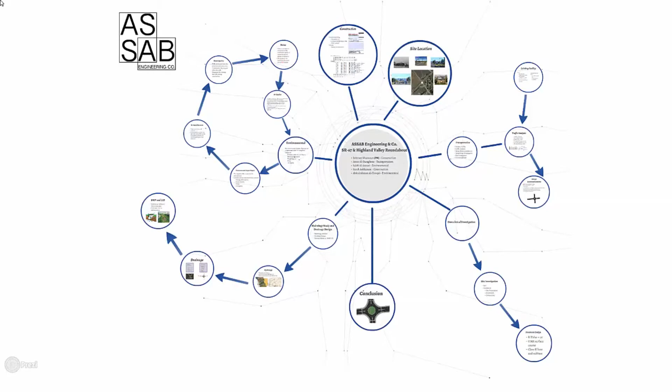My name is Abdulrahman Al-Hukal, and I'm in charge of the hydrology study and drainage aspect of this project. My name is Sarah Ashkenani, and I am in charge of the construction scheduling, and I aided in the transportation aspect of the project. In this video, we will be discussing our approaches and findings of the project.

We have been hired to do the SR67 and Highland Valley roundabout. Our design team will address the transportation, stormwater, environmental, and construction aspects of the project. The purpose of this project is to improve traffic flow on State Route 67 with the design and production of an effective roundabout. An effective roundabout assists and accommodates the flow of vehicles with both safety and efficiency.

The SR67 and Highland Valley intersection is planned to be developed into an efficient roundabout. The SR67 and Highland Valley intersection has been dealing with insufficient roadways for years, with high levels of traffic congestion and queue lengths of over 2 miles. State Route 67 is known as a highly dangerous highway due to high numbers of fatalities on the road.

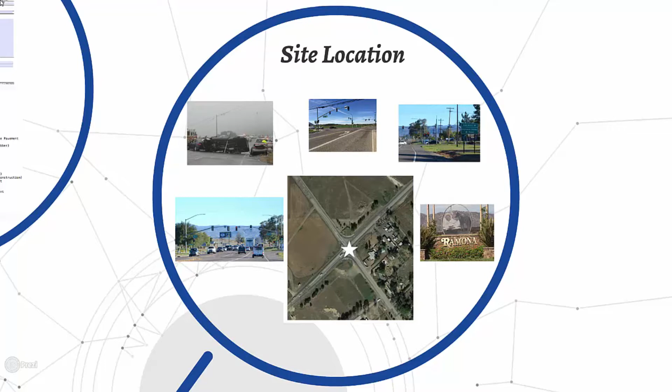This study was done to evaluate the potential geological concerns at the subject site, since it relates to the proposed development and design parameters. Based on the map from the Hydrology Manual of San Diego County, the soil in the area is Class C, meaning that it has a slow infiltration rate. There are no fault zones in close proximity, as well as non-active seismic zones.

However, the soil on site is prone to liquefaction, which is why the topsoil and subsurface soil should be removed and compacted again. Earthwork will consist of site preparation, excavation, and compaction. Any compressible material must be removed and oversized rock should be hauled off-site.

The soils on-site can be used for compacted fill if they do not contain any debris, organic materials, or oversized rocks. The fill soils should be relatively compacted to at least 90% based on the maximum dry density of the ASTM test method D1557.

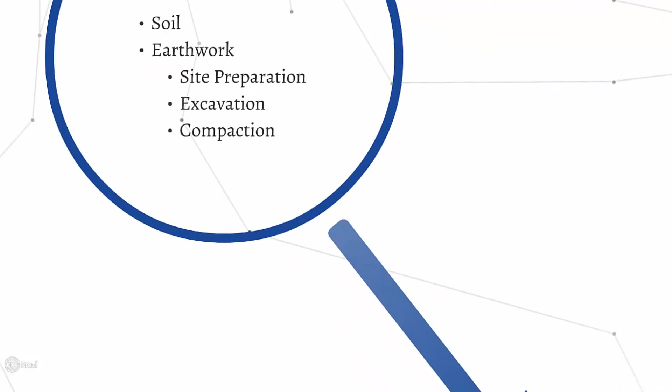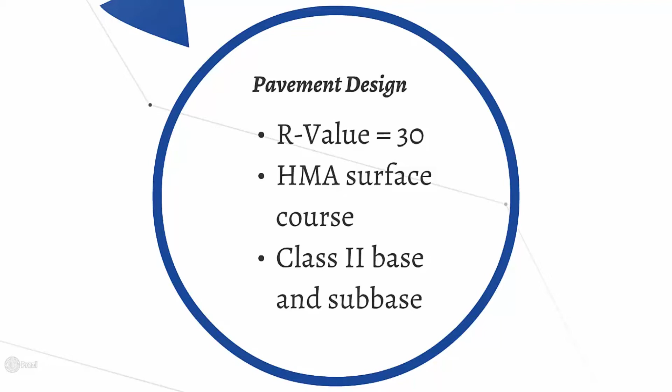An R value of 30 was used for the pavement design based on our experience of the area and the review and evaluation of geological and geotechnical literature. The new pavement structure will consist of a hot mix asphalt surface course and Class 2 base and sub-base. After conducting a geotechnical investigation of the site, the proposed development is feasible from a geotechnical perspective.

The existing facility consists of SR67, which is a 2-lane rural highway with traffic lanes and shoulders of 12 and 8 feet respectively. A 12-foot left turn lane and a 12-foot right turn lane are present in the north and southbound directions, and it is maintained by the State of California.

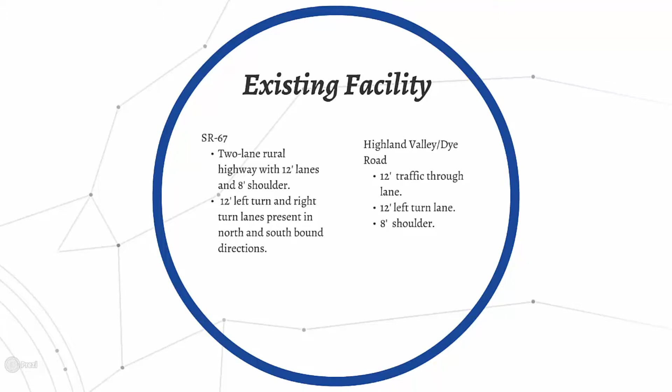Highland Valley and Dye Road consist of a 12-foot traffic through lane, one 12-foot left turn lane, and an 8-foot shoulder in both directions, and it is maintained by the County of San Diego. The traffic analysis report analyzes the current traffic and future conditions of the intersection. This is a key intersection but experiences more traffic than nearby intersections.

The existing peak hour volumes were analyzed to assist in determining the level of service. The method used to determine the level of service of the intersection was based on average vehicle delay from the Highway Capacity Manual and the principles of highway analysis. The level of service of the intersection is usually E or F, which is undesirable and considered unstable flow of traffic, and it should usually be C or higher.

Average daily traffic volumes of the intersection are around 30,000, and the projected future traffic will be around 40,000 by 2040, meaning there will be a 33% increase at least. It is important to consider truck and pedestrian data for design. Truck volumes are typically lower than 10% in the area, and there is minimal pedestrian activity.

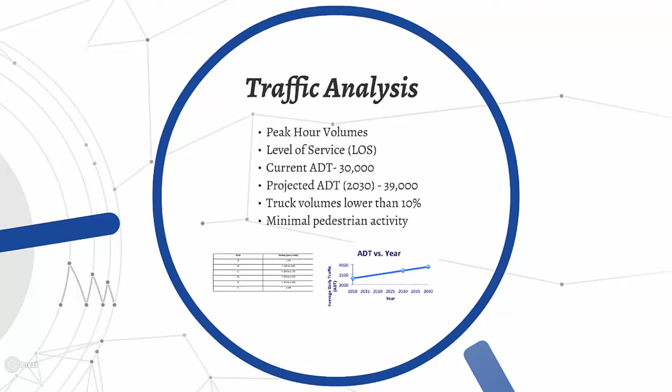It is recommended to design a two-lane roundabout to improve the flow of traffic. Intersection volumes were converted into roundabout volumes to determine the number of lanes based on the operational analysis by the National Cooperative Highway Research Program report. The capacity was usually greater than 1,000 passenger cars per hour, so at least two lanes are required, based on the report. The circulatory roadway shall consist of individual lanes of 14 feet, resulting in a total of 28 feet.

The central island will be 108 feet, and there will be a truck apron around it. The inscribed circle diameter is 180 feet. SR67 and Highland Valley Dye Road both will have two 12-foot lanes in both directions, separated by splitter islands.

Since there is minimal pedestrian activity based on the traffic analysis, the design includes a 5-foot bicycle lane that will end near the crosswalk for the pedestrians on the splitter island, so bicyclists can traverse the roundabout like pedestrians. According to the traffic analysis, SR67 experiences much more traffic than Highland Valley Dye Road, and the through traffic volumes were substantially greater than the right and left turn traffic.

The proposed roundabout shall include entry radii that are larger on Highland Valley Road than SR67, since most volumes are through traffic on SR67. To achieve this, the alignment of the roundabout will not be exactly on the intersection to promote the desired curvature

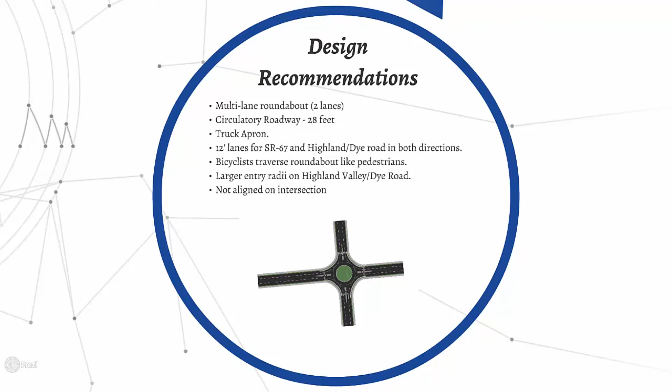Ramona City is within the San Dieguito watershed, which is one of the 9 watersheds in San Diego County. The intersection is part of Santa Maria Valley hydrologic area. The natural water paths direct the water flow towards Santa Maria Creek. Based on the hydrology study conducted on the project area, the stormwater runoff drainage system is designed.

Prior to designing the roundabout stormwater drainage system, the existing condition was studied. 3 culverts were found in the project area. The 2 on-site culverts will be removed in the proposed modifications applied on the drainage design. The off-site culvert is found to be applicable for the proposed drainage design.

The proposed runoff drainage design for the roundabout features 1 pipe installed at the center island of the roundabout. The circulatory roadway will be downgraded with 2% slope, which allows the runoffs to flow toward the curb opening. An open channel will be implemented to carry the runoffs to the pipe. Roundabout legs will not feature culverts. Legs will be graded with 2% slope.

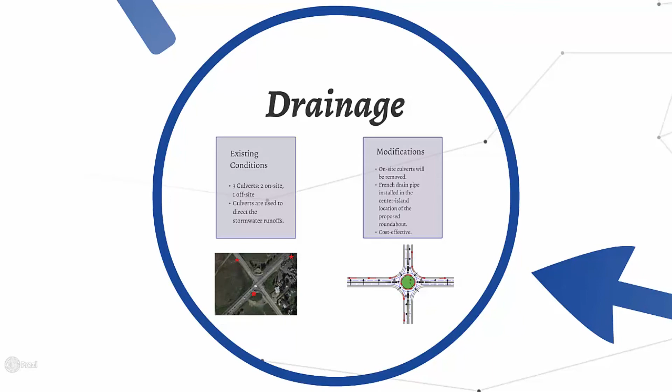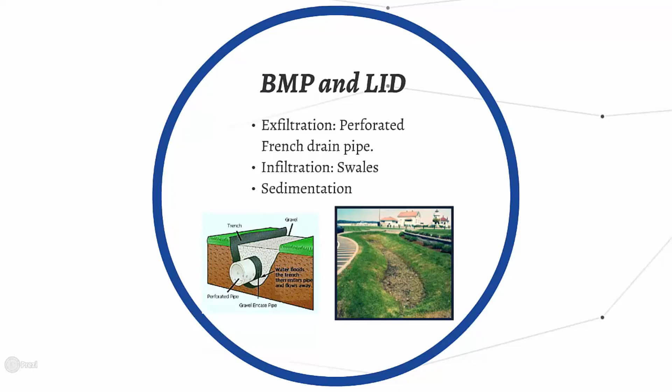To meet the BMPs and LIDs requirements, swales will be used to infiltrate stormwater runoffs. Also, a perforated French drain pipe will be implemented. Coarse gravel will cover the surrounding area of the pipe to aid in exfiltrating the stormwater runoff.

The construction scheduling of the project starts with the basic planning for the work breakdown structure and ends with a detailed graphical representation of the sequence of tasks in each sector of SR67 and Highland Valley roundabout. The objective of scheduling is to determine the time and sequence of operations in the project and their assembly to give the project its overall completion time, and hence find the compatibility with the project's cost.

With the utilization of a programming tool such as Primavera P6, the procedure of scheduling starts with breaking the tasks into a digestible set of components, establishing task durations based on realistic estimation and application experience, and binding the activities together through specific relationship types to run the critical path method, CPM. The reason behind using the CPM method is to manage the time needed for the network activities to be completed and list the critical activities in a mathematical algorithm. This method helped us determine the start and finish dates of each activity.

The work breakdown structure contains earthwork, structural items, drainage items, environmental items, traffic items, and other specialty items. Each section contains activities that are internally connected with relationships and externally connected with other sections' activities. For earthwork and structural items, most of the activities have the relationship type of start to start with lag, and finish to start relationships. We also use the PERT method in conjunction with CPM to estimate the risk needed for evaluation.

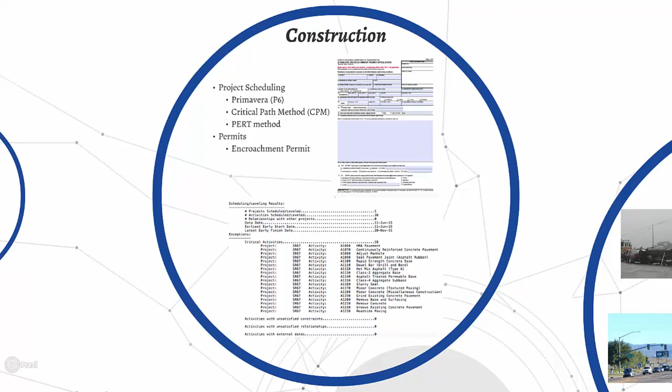The study of the environmental impact report discusses the impacts and issues that might arise from the proposed project. The project includes various environmental concerns that can be potential issues regarding the environment. Mitigation attempts were taken to lower the impacts on the environment before the project initiation. There are 4 different areas that are considered to be affected with the project being accepted. Those areas are biological resources, water quality, noise, and air quality.

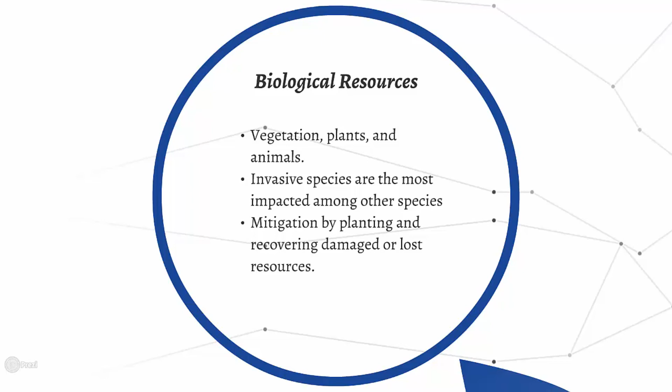Biological resources are of most concern in this project. It is required to mitigate any impacts on the biological resources that include vegetation, plants, or animals. Invasive plants are the most impacted resources in this project. Mitigation plans were carried out for those invasive species by relocating the endangered plants to the roundabout island. Also, we decided to plant a ratio of 3:1 for the other plants that might get affected.

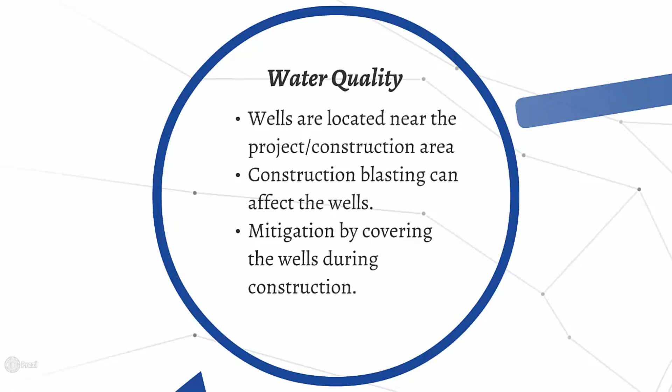The water quality is also an important concern for this project. There are several wells around the area of the project that can be affected while constructing the roundabout. Therefore, all existing wells that might be affected by blasting and constructing will be covered during the construction phase. Noise is also an important factor to be considered in this project. Noise will be mitigated by not exceeding the sound level of 75 decibels while constructing the roundabout between the time of 7 a.m. to 7 p.m.

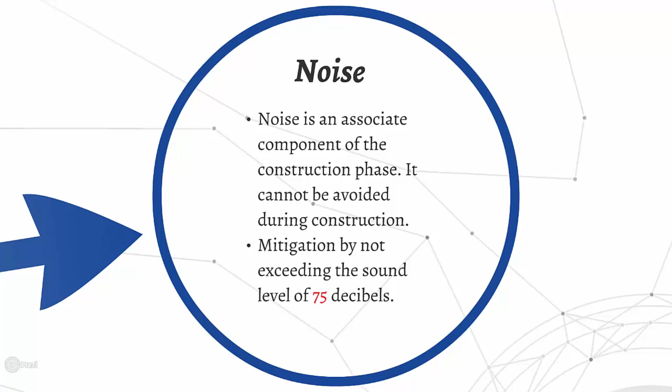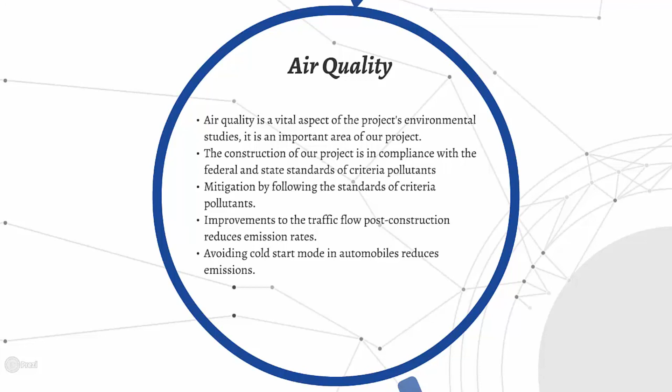Air quality is also a crucial factor to be taken into consideration. While constructing the roundabout, the standards for the federal and state criteria pollutants will be followed. Moreover, post-construction of the roundabout will greatly improve the flow of traffic and will avoid cold start mode for vehicles. Thus, the emissions from the roundabout will decrease. Overall, those impacts on the environment were determined to be insignificant.

The SR67 and Highland Valley roundabout project was found to be applicable to the intersection. The roundabout improves the level of service and lessens the queuing in the area. Our roundabout design will safely and efficiently improve traffic flow and reduce congestion.